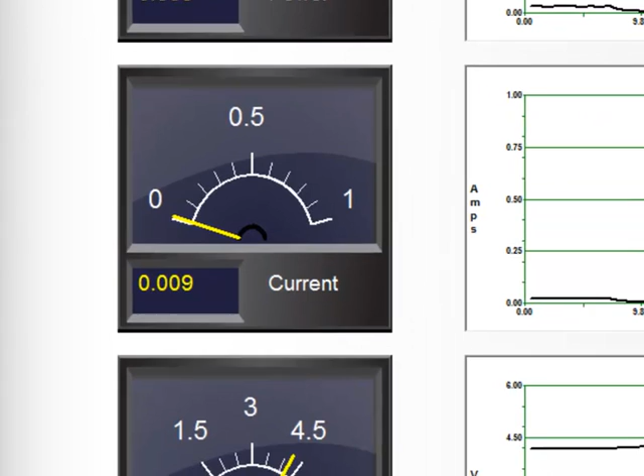Welcome to the EcoCAD real-time energy monitoring software. What we're seeing here is three plots of power, current, and voltage. The top meter and top plot is power in watts, the center meter is current in amps, and the bottom meter is voltage in volts. As you can see in each meter, we have a needle type gauge, and below it, a little box that shows the actual power, current, and voltage numbers.

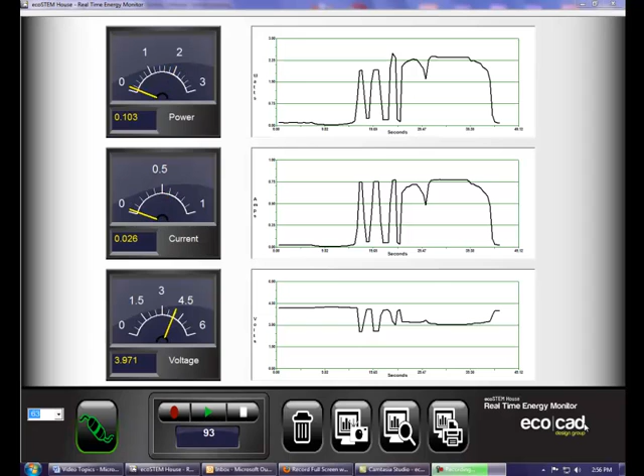What we're seeing here is a plot of a previous experiment. This is our data logging feature. With this software, you can record anything from about a couple of seconds up to about 8.5 minutes worth of an experiment and play it back in real time.

Before anything can happen, you need to connect the control panel on the EcoStem house to the computer using a standard USB cable. Plug one end into the EcoStem house electronic control panel and the other end into the USB port on the computer. Then on the desktop, double click on the EcoStem house icon. You'll see a logo come up, and while it's there, the program is loading in the background. In a few seconds, the program will come up as well.

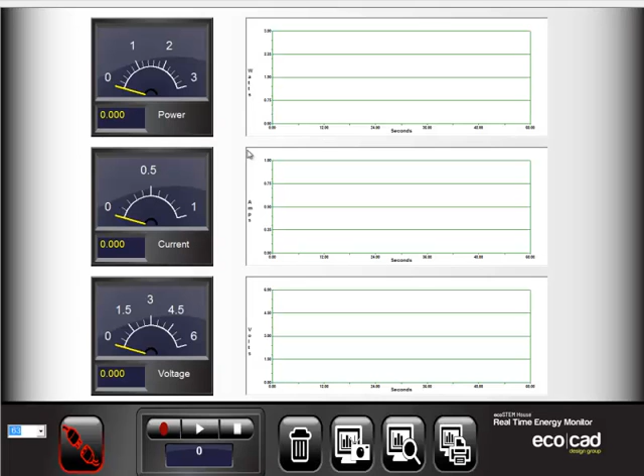Before anything can happen, come down to the lower left-hand side and notice the connect icon. This is red, showing a disconnected icon, meaning the program is not yet connected to the electronics on your EcoStem house. So simply click on it once, and it'll turn from red to green, meaning you're connected.

Now that we're connected, let's do some experiments. We're going to go over to the EcoStem house control panel and turn on some voltage, actually turning on the batteries. Right now the batteries are on, reading about 4.3 volts, and you can see the plot going from basically 0 to 4.3 volts. I'm going to turn the batteries off again, and you can see the gauge goes down to 0 and the plot goes down to 0 as well. I'll turn it on again, and here we are back at 4.3 volts.

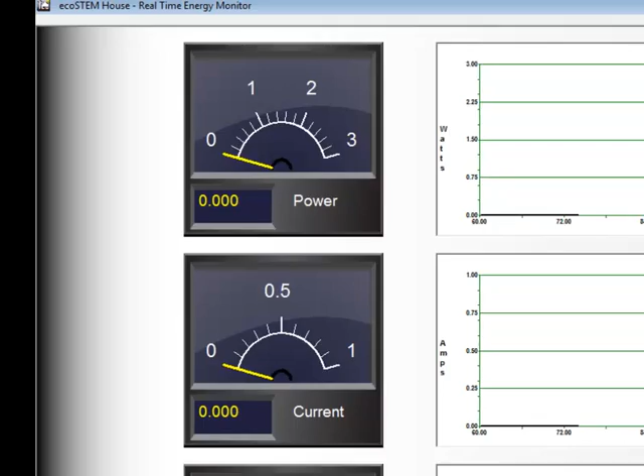Now you also notice that we don't have any power or current, and the reason is that we don't have a load connected. To get power or current, you actually have to have a load connected. In this case, a load can either be the LED lights in the ceiling, the ceiling fans, the supercap car, or anything else connected through the load sections. I'm going to turn on one of the loads we have here, and if you'll notice, there's a slight little dip in the voltage because there's a bit of a load connected.

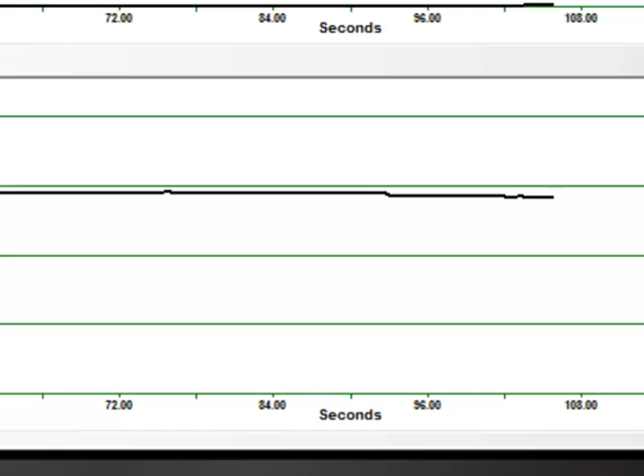I'm going to turn up the load a bit now, and we'll be able to draw some power and current. As you see, the power and current plots are coming up. I'm going to change the load a bit more: decrease the load, increase the load, decrease the load, and so forth. You can see the plots following the meters very carefully here.

Let's talk about one of the important features of the program, the trash icon. The trash icon is nothing more than a reset for the program. Anytime you're confused or certain plots don't look good and you want to go back to 0 again, click the trash icon, that's all you need to do. You'll hear a little bell, and everything will reset back to 0 time. For example, if you look at the plots right now, you'll see the plot goes back to 0 time every time I click the trash icon.

What I'm going to do is turn on some voltage. I'm going to click the trash icon, and you'll notice it goes back to 0 time, but the voltage is still there. I'll turn the voltage off, and now we'll click the trash icon, and the plot starts all over again.

Another important feature of the program, probably one of the most interesting, is the record feature. That's this set of icons: a record button, a play button, and a stop button. Down here is a counter to count the number of data points coming in from the control panel. We have up to 1,000 data points, and the control panel puts out about 2 data points per second, giving us about 500 seconds of recording, or about 8.3 minutes.

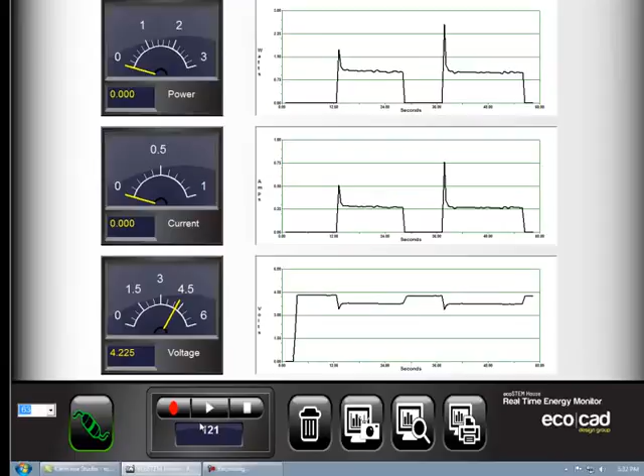We'll talk about that later. As you see, the recording is still proceeding - we're at 110, 111, and so forth. All right, I'm going to turn off the load, and let's stop the recording by hitting the play button.

Now when we hit the play button, everything starts from 0 again, and we're going to replay our little experiment. The replay goes a little bit faster than the recording, but it's pretty much in real time. You'll see everything we've recorded up to the very end, around 112, 120, whatever it was. We'll see that come up here in a second. Once it hits the end, it'll just begin to repeat again over and over.

One of the advantages of this playback feature is that we can pause it, just like I did now. So we can actually pause, play, pause, replay. This feature gives us the ability to freeze the display and look at the voltage, the current, and the power specifically to see exactly what the numbers are.

Let's continue along here - let's say here's a peak, okay? This is where we actually turned the power off, or the load off, and now we see the power go to 0 and the voltage come back up to a non-load voltage condition of, in this case, 4.249 volts.

Let's continue. Here we'll turn on the load again, and we'll stop it. If my fingers were quick enough, I'd have picked up the peak there, but here we are just after the peak of the motor fan turning on. We have frozen the power at 1.02 watts, the current at 0.274 amps, and our voltage at 3.722 volts. This gives us the ability to play and pause this ad infinitum.

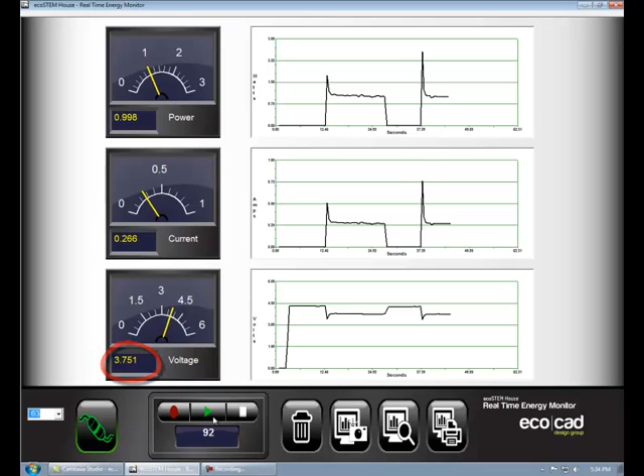So basically you can record an experiment, play it back, pause at any time, and be able to analyze your experiment after you've done it. So nothing is really lost.

Now what we want to do too is go back to real time - right now we're in the play mode, so to go back to real time we just hit the stop button. You'll notice that the stop button goes back to white, the play button is also white, and the record button is a dim red. But we still have a number down here, 129, which indicates the maximum number of data points we did for this experiment.

To show you that we're back in real time, I'll turn on the load again, the fan.

So it shows you we're back in real time again. That's our record feature. And anytime we want, we can begin another recording by simply hitting the record button again. So when we do this, our recording starts all over again, and we are able to then record a brand new set of recordings.

So finally, remember that to stop a recording, you can either hit the play key or especially the stop key. Notice this, the stop key is going to go from white to green to white very rapidly, but it'll go from white to green to white. That will stop the recording and put everything back into real time. That's very important.

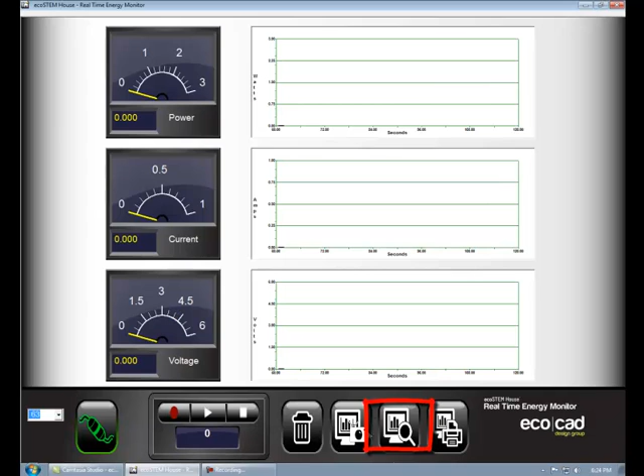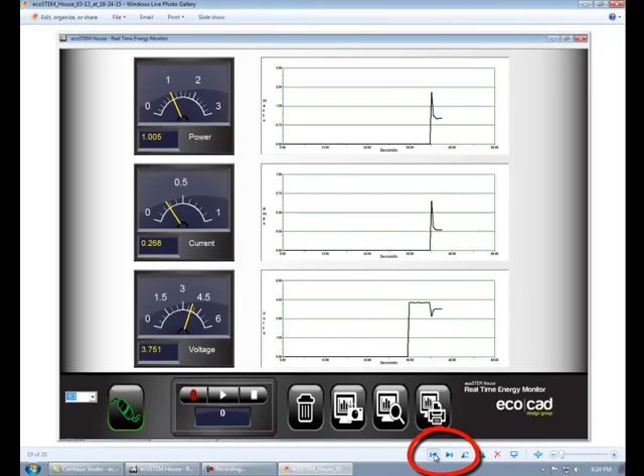Now let's go to the right and click on the screen view icon. Now what we see here is the last captured image that we have actually clicked on. You notice that this is the last image we clicked on, and what we can do here is go back in time and look at the other images that we actually made.

Here's the 3 we had. Here's some from a previous experiment. But here's the one, this is the first one we clicked on, the second one we clicked on, the third one we clicked on. And you can do this as many times as you want.

Now look at the advantages you have here for an experiment. You can say, what happened right here? Just click on it. And now all of a sudden that image, which is a JPEG image, is saved on a file. And you can go retrieve that file, and you can take this old image and put it in a report, and do this ad infinitum. So you can just keep on clicking and saving and so forth.

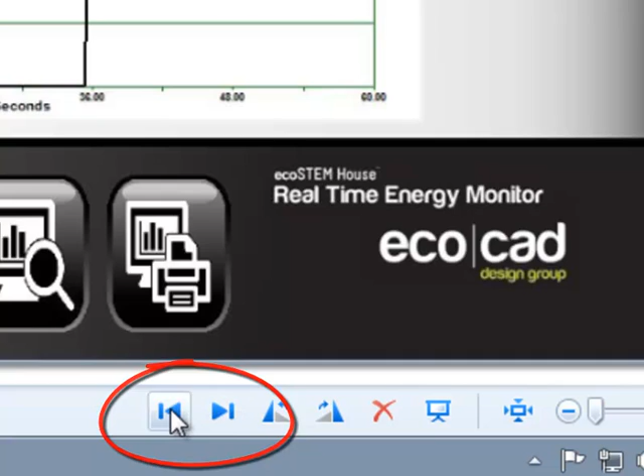One of the important things to look for are these little arrows down here at the bottom of the screen. We'll zoom in on them. This is the backward arrow, this is the forward arrow. You'll be able to kind of move back and forth using these arrows. So make sure you can do this.

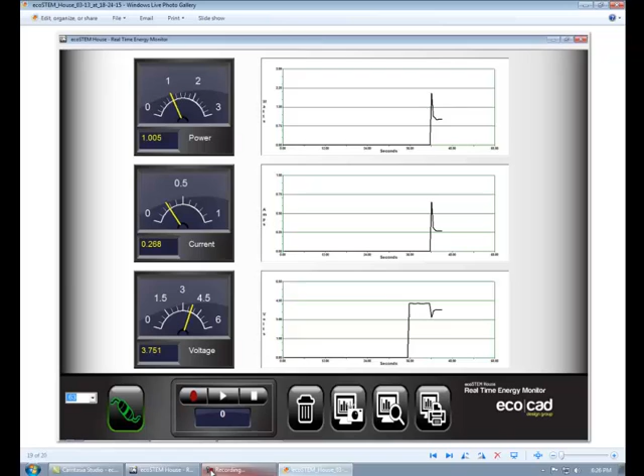But here's another important thing to realize, and that is this screen, or the captured images, look so much like the real screen, you'll get confused once in a while and you'll think you're back in the program, but you're not, you're still looking at the captured image. So make sure you go back here to the real program. Here I'm going between the images and the program, images and the program. So make sure you're back in the program again, where you can actually do your experiments.

And finally, there's a third icon here called the print icon, and I can't show you this on the screen, but if you click this icon, just like a snapshot, you'll be able to print out the screen as it appears right now. For example, I'm going to click on it. Maybe you can hear the printer begin to engage. Well, my printer's not cooperating, so there it goes.

All right, so what I've really done here is I have captured, just like a snapshot, the real-time image, and I've printed it out. And so what you can do with these printouts is actually print them out, capture them, and hand them out to the students to make sure that they can actually have something to take and record, and to actually go home and show their parents if they want.

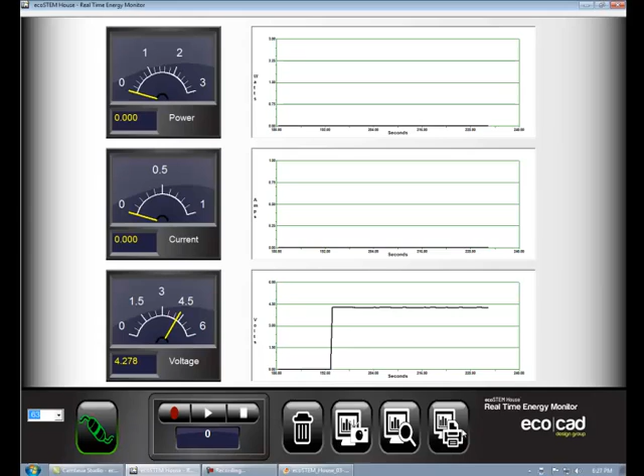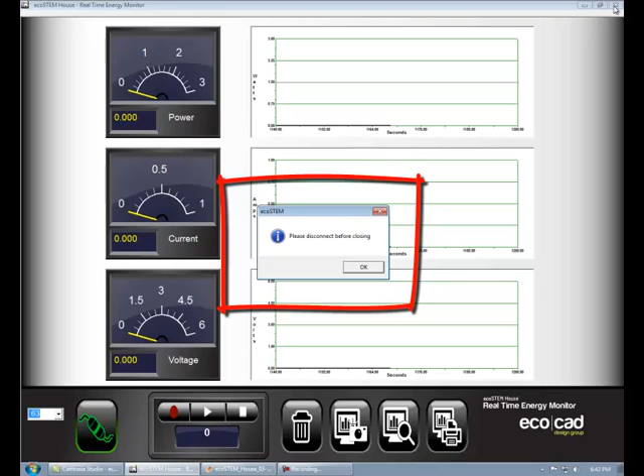Well, that's about it for the EcoCAD Real-Time Energy Monitor program. Just remember, when you're done with the program, come down here to the Connect icon and click it to disconnect first. Otherwise, if you try and just close the program, you will get an error message that says, please disconnect before closing. So disconnecting means coming down here to the Connect icon, close it, and then come up and close the program.